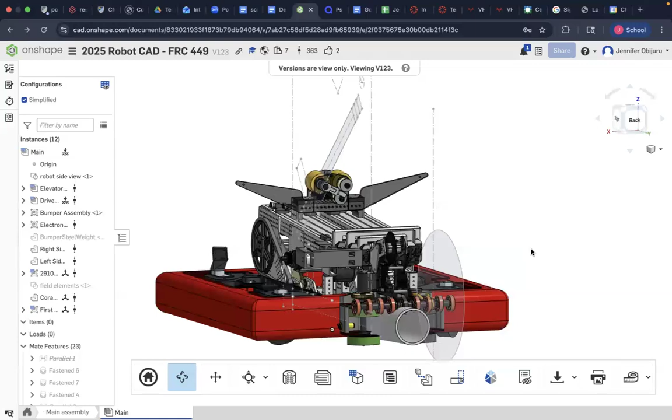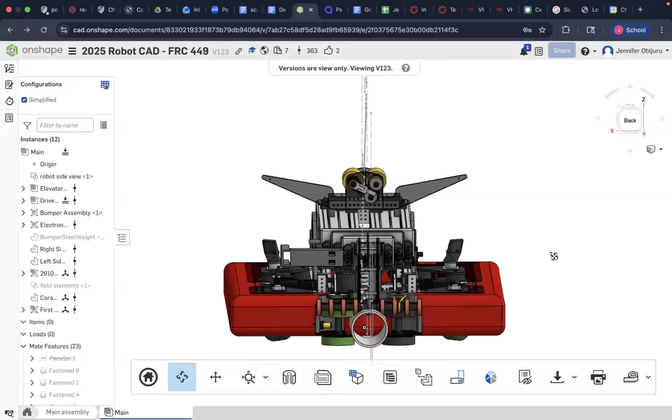2. Reliable ground intake to quickly collect corals for maximum efficiency. 3. Controlled internal indexing to prevent jams and not lose match time. 4. A multi-level elevator to score on all reef heights for better scoring. 5. A climber to complete endgame objectives, which could earn more points. All of these systems work together to allow the robot to score consistently throughout the match.

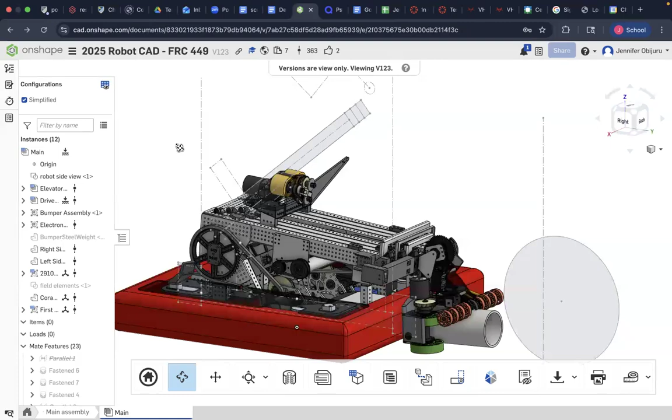Now, breaking down the robot into its major subsystems, relevant to its overall robot strategy, we have: first, the drivetrain; second, the ground intake; third, the indexer; fourth, the elevator; and finally, the climber. These are the subsystems we'll be talking about. Each part was designed with both performance and reliability in mind.

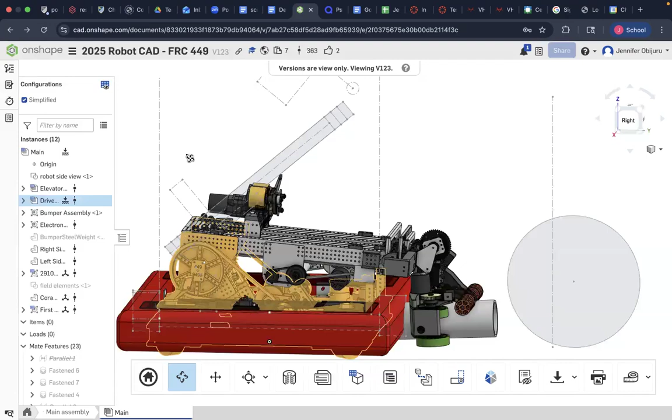So the first one we'll talk about is the drivetrain. This robot uses a swerve drivetrain, which means each wheel can rotate independently. This design allows the robot to move in any direction without turning, make quick, precise adjustments while lining up shots, and rapidly reposition between scoring locations. The significance of swerve drive is that it gives them a huge competitive advantage.

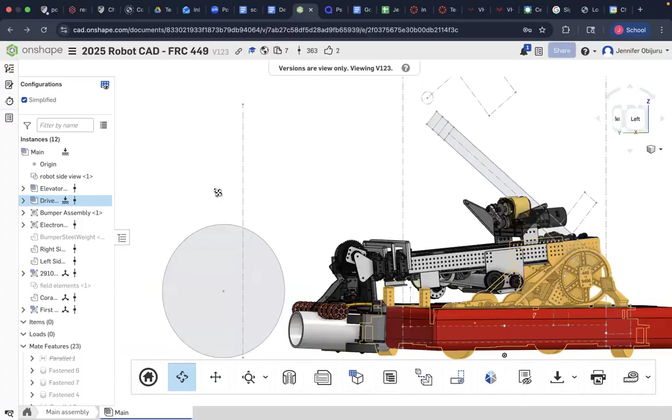You can approach the reef from optimal angles, dodge defenders, and line up scoring actions more efficiently than traditional drivetrains. While swerve drive is mechanically and programmatically complex, the payoff is speed, agility, and precision, all essential for Reefscape.

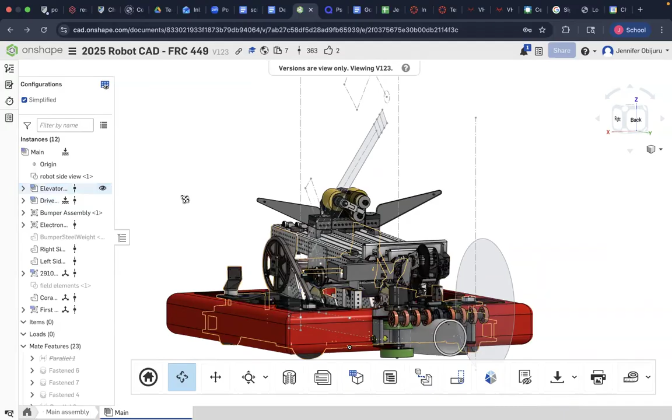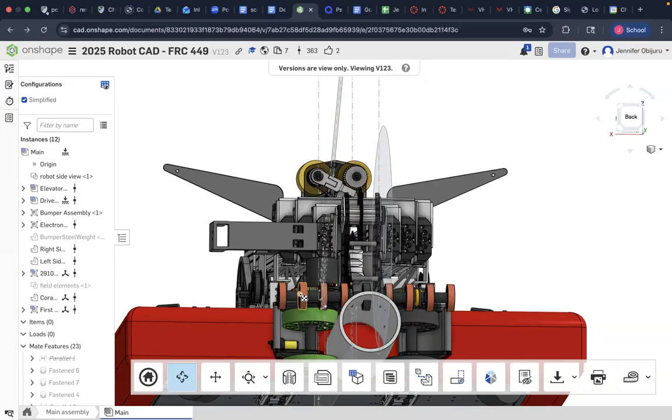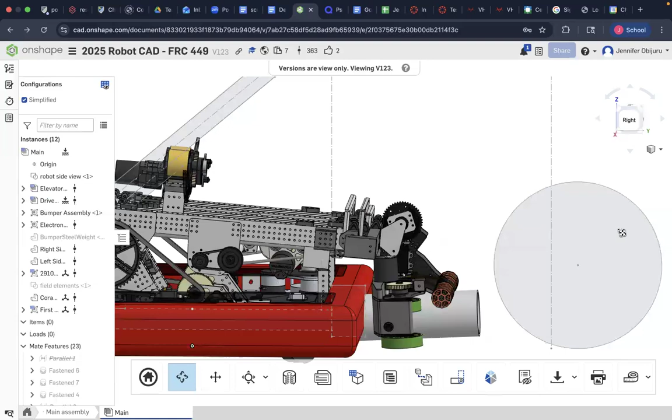So the second subsystem we'll head into is the ground intake, which is responsible for collecting corals from the field. The intake pulls corals in through the lower front area of the robot. Once the coral is captured, a system of rollers moves it upwards and into the robot. This internal path design allows for fast collection, reduced risk of pieces falling out, and smooth transition into the indexing system. Because the intake opening is relatively narrow, the programming team should have implemented object detection to ensure the system only runs when a coral is present.

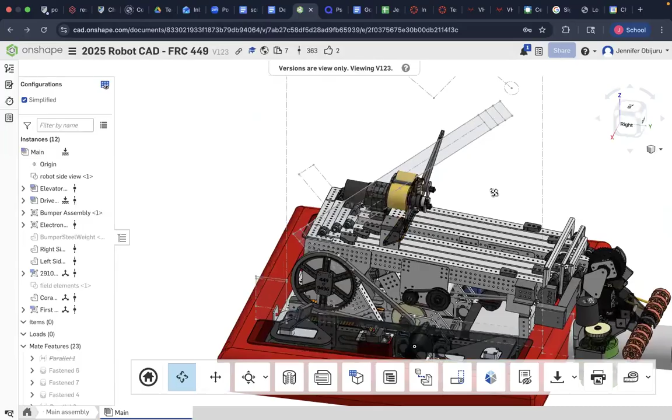This helps prevent jams and unnecessary wear on the motors. Once the coral enters the robot through the ground intake, it travels through the indexer, the next subsystem we'll talk about. The indexer's job is to control spacing between corals, ensure only one coral is positioned for scoring at a time, and to prevent jams, because jams can cost valuable match time. By carefully controlling the movement of corals inside the robot, the indexer improves reliability and scoring consistency. This subsystem acts as the bridge between intake and scoring.

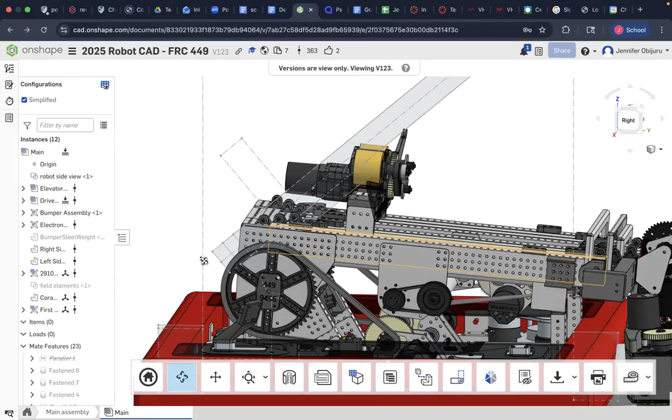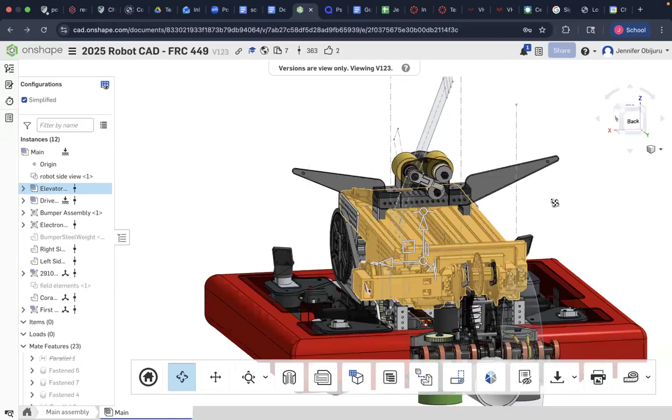Next we'll talk about the elevator. This is probably one of the most important subsystems on this robot. Specifically, this elevator allows the robot to extend upward to place corals on the reef to score points. It can also score at 3 different height levels, which maximizes scoring, and it adjusts quickly depending on match strategy. This elevator has a maximum extension of 18.5 inches, which was carefully chosen to balance reach with stability and not exceed the limit set in the Reefscape game manual.

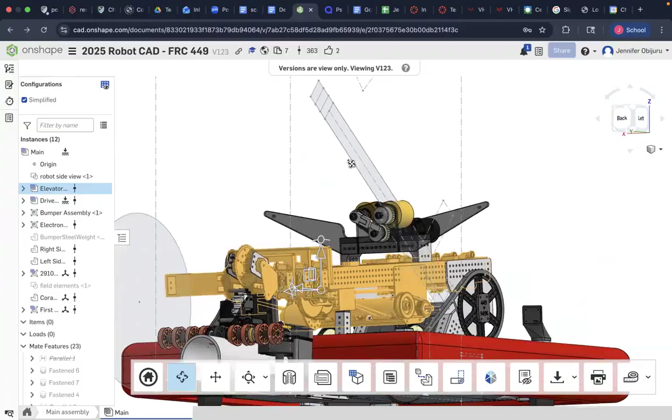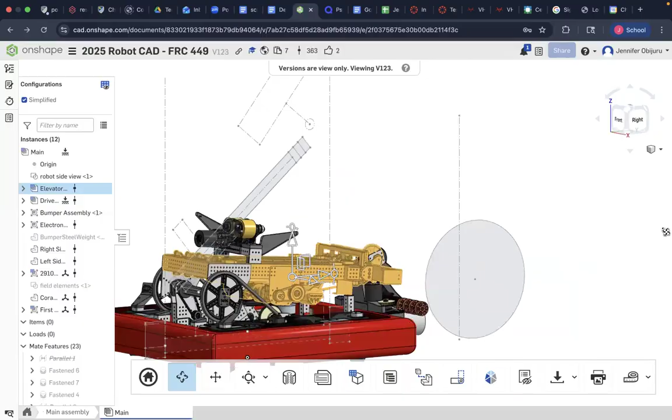If grip is lost while placing a coral onto the reef, the design of the robot ensures that the coral falls safely onto the robot body rather than off onto the field. By having multiple extension levels, the robot can score efficiently at different reef heights without wasting time on unnecessary movement.

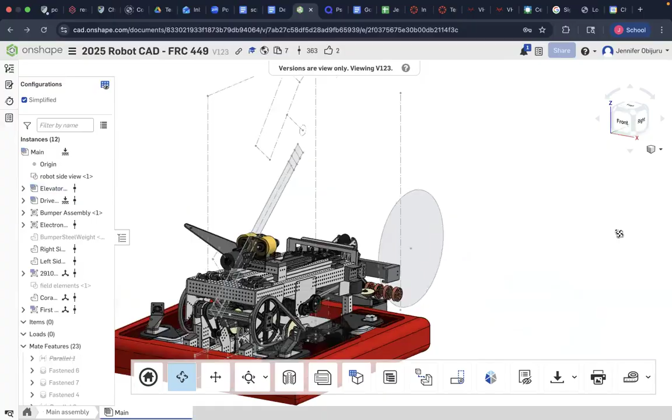So the last subsystem we'll talk about is the climber. The climber is used during the endgame portion of the match. Its purpose is to secure the robot to the climbing structure, earn additional points for the alliance, and complete match objectives consistently. The climber was designed to be simple and reliable, ensuring it works under pressure when matches are often decided by a small margin.

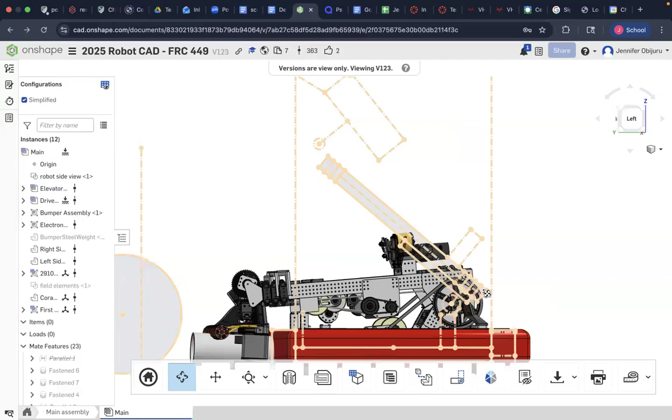So now we'll be talking about why Team 449 built the robot this way. Every design choice on this robot was intentional. One major feature is the pivot system, which allows the robot to score from both the front and the back. This greatly increases flexibility and reduces the need to turn around during matches.

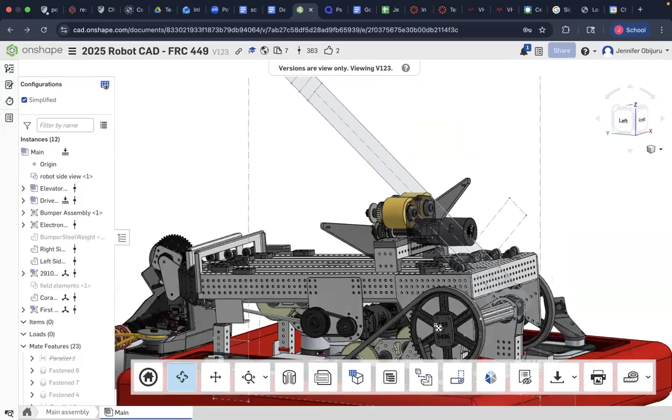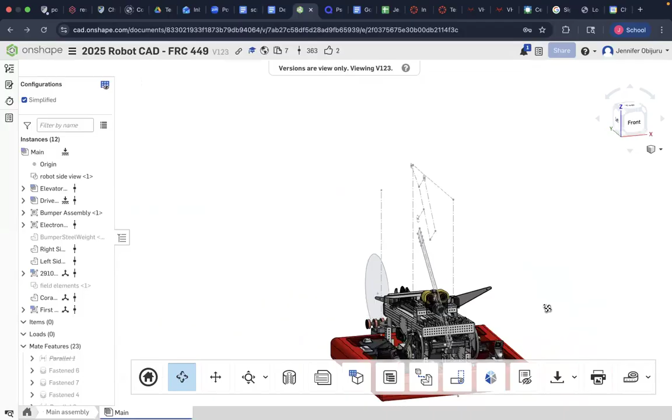They also focus heavily on maintaining a low center of gravity. Even when the elevator is fully extended, the robot remains stable, reducing the risk of tipping. The elevator design itself also contributes to both scoring versatility and balance, allowing them to reach all scoring levels without sacrificing control. Overall, this robot was built to be fast, stable, precise, and adaptable.

So in conclusion, to summarize everything we've talked about so far, Team 449's Reefscape Lobster Robot reflects a commitment to smart engineering and strategic design. From the swerve drive that enabled rapid repositioning, to the ground intake and indexer that ensured reliable game piece control, to the elevator and climber that maximized scoring potential, every subsystem worked together to meet the demands of competition.